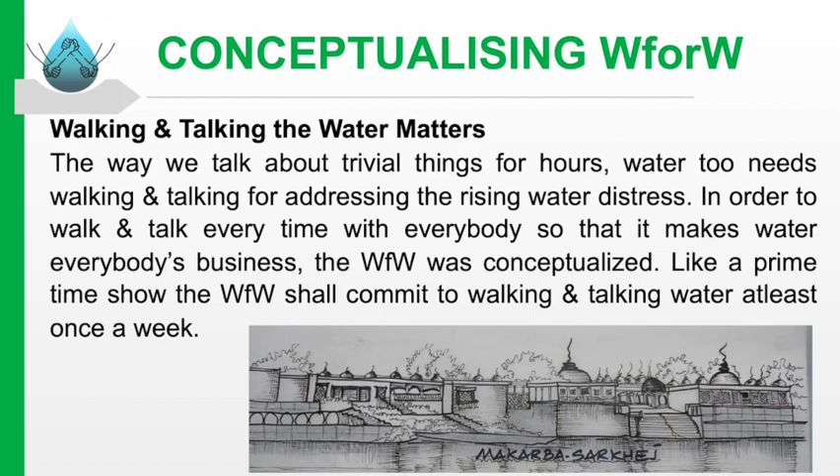The way we talk about trivial things for hours, water too needs walking and talking to address the rising water distresses. The way Wednesdays for Water is conceptualized as a prime time show, it wishes to make water everybody's business. The idea of the series was conceptualized in August 2020, and by the end of the year, the team and the structure was pretty much in shape.

We started in April 2021 with Dr. Rajendra Singh's inaugural speech. We wish to bring science and society together, and therefore we try to bring in every session either a policymaker or practitioner and a researcher or academician. We also think that future generation is crucial and therefore they have presence in each session.

We are going stronger with every week now with session on either quiz, couple of weeks of hard talks, and a week of soft session of art and music. There is a simple structure for each session of quiz, hard session, and soft session, which are moderated by the core team member. Here is a glimpse of what we call as hard sessions and soft sessions.

Yes, good evening, everyone, and thank you for joining us for an interesting Wednesdays for Water session on the theme of wastewater treatment and environmental sustainability. And the process of wastewater treatment has actually many benefits, and that makes it very important for achieving environmental sustainability in the short term, medium term, and long term.

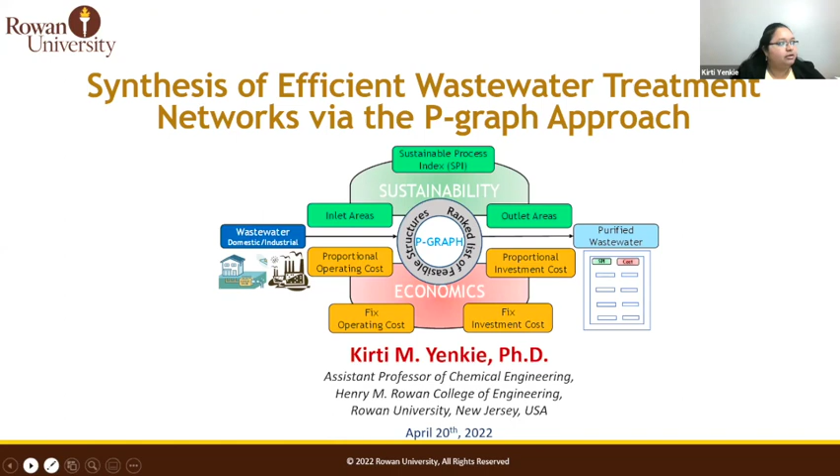The first graduating class was in 2000, and currently we have 6 bachelor degree programs, including chemical engineering, civil and environmental, electrical and computers, mechanical, biomedical, and experiential engineering. We also have a master's and a PhD in engineering program. And this is one of the fastest growing research universities. So I'm glad to be part of this institute.

With that, I would now like to talk a little bit about the overview of my talk. So first of all, as my area is systems engineering, which is mostly related to mathematical modeling, optimization, and control, I would like to pose the wastewater treatment problem and explain why systems engineering or modeling can help us with efficient synthesis of these networks.

Then the designing aspect and what goes into the process. Then I will explain a methodology which is based on graphs and networks, known as the P-graph method. And then I will demonstrate this approach via a case study, which has the municipal wastewater, some results, and then conclusions and future work.

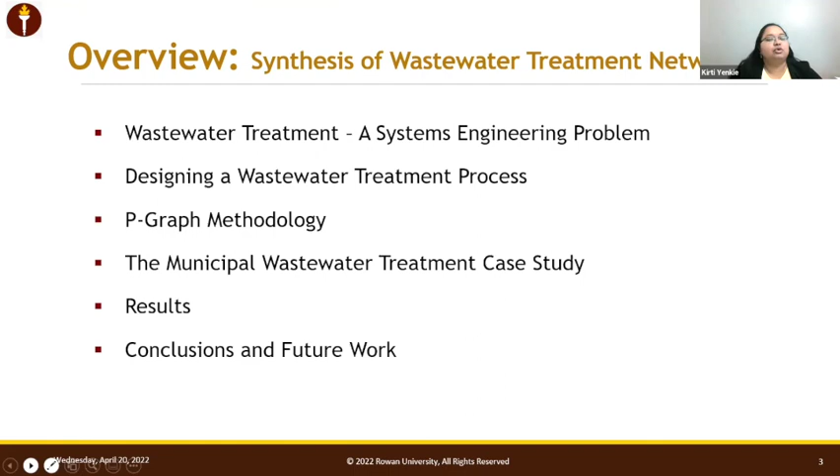So I think this community is well aware that we do need to look into other aspects of recovering water, because if you look at the total world availability in regards to water, much of it is in the form of oceans, which are highly salty. We cannot use them. We only have about 2.5% of freshwater resources. And in that also, most of that is in the form of ice and snow. So that leaves us with very little freshwater and groundwater resources.

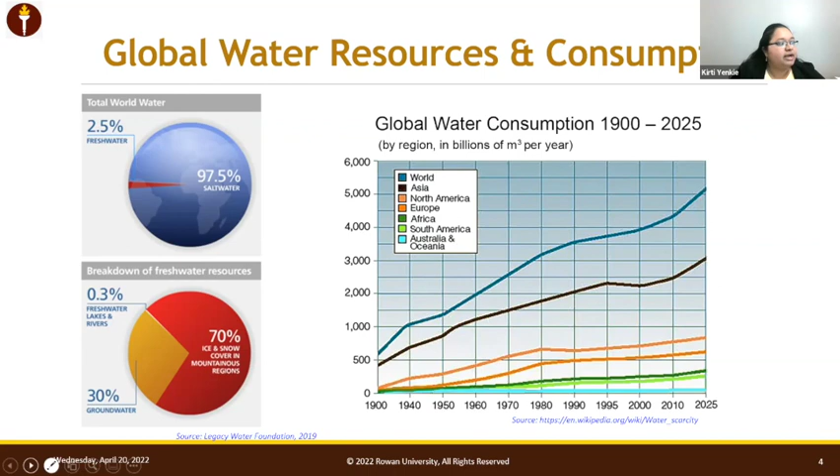And if we look at the overall statistics of how global water consumption has been increasing in the past, I would say around 125 years, we can see that there is an increase in all the continents of the world. So there is this increasing demand, but we do have resources which remain constant. And that is where we have to come up with a solution where we can meet the increasing demand for water. And that is where treating and recycling water could be an alternative. In order to do that, we need to come up with efficient wastewater treatment methods today, so that in the future we can satisfy these growing needs.

And everything, when we start with something, it takes a process. We have to work on that and improve it further so that we can finally get something which is more sustainable. And that is where systems engineering can help and provide you with some sustainable as well as cost-effective insights, because we do want to be cost-effective as we are looking at treating waste, and we also have to balance the overall cost as well as environmental impact whenever we are designing a new process.

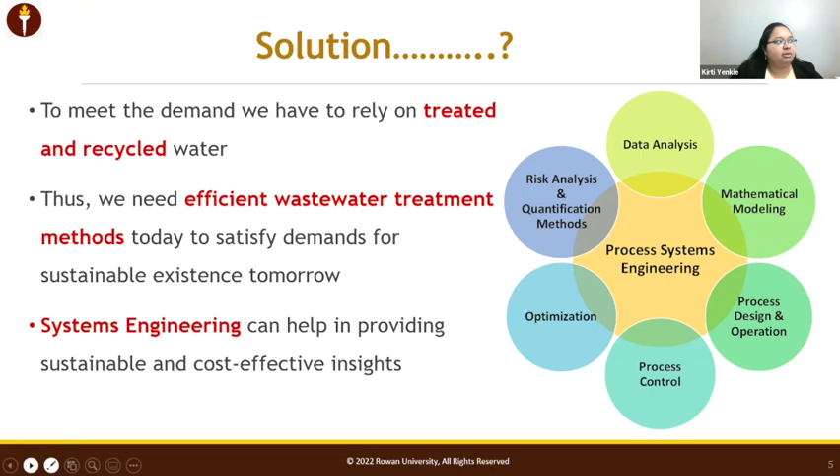So as I mentioned, process systems engineering encompasses multiple dimensions. It includes data analysis, mathematical modeling, process design and operation, process control, optimization, risk analysis, and quantification methods. Now, these are all related to the more computational side of things, but if we look at the wastewater treatment problem and try to analyze it in a systematic way, what do we see? That wastewater can come from multiple sources or multiple industries and areas.

So we could have wastewater coming from a food industry, which could be large in volume, and most of the waste could be starches, then food colors and all those kinds of agents. Pharmaceutical is another type of industry. The wastewater here would be containing active pharmaceutical ingredients and maybe some hazardous solvents. So in those cases, treating the wastewater will be very different as compared to what you would do in a food industry. And you can see many other areas from where we can find wastewater. Power plants, hydrothermal power plants usually use them, chemical industries, also domestic sources, agriculture, and so on.

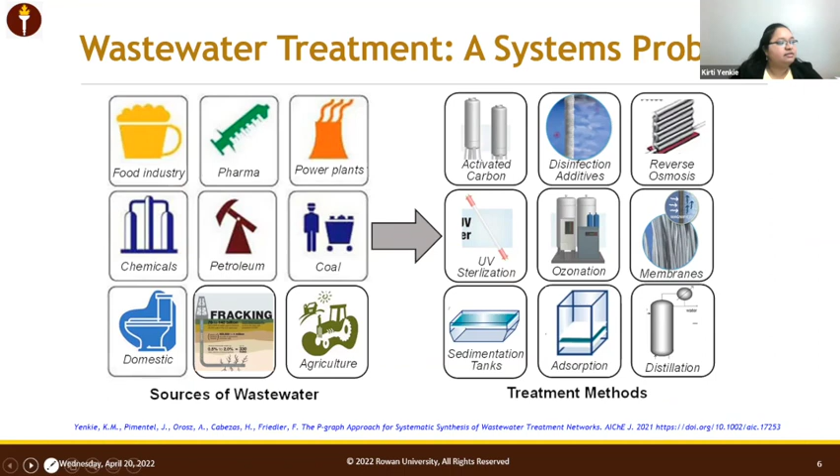And if we look at the available treatment methods, there are multiple options. We can use activated carbon, we can use disinfection, membrane processes like reverse osmosis, and so on. We can also use UV sterilization, advanced oxidation or ozonation processes, settling tanks, and so on. So in order to find out which particular method or a combination of these methods would treat a specific type of wastewater more effectively, we have to match them well and then decide on a cost-effective as well as a sustainable process. So in that sense, this appropriate selection becomes a systems engineering problem.

And then when we look at the overall complexity or what goes behind when we try to design a systematic treatment process, let's look at just one of the tasks, which is solids removal. Solids can be removed via multiple technologies. We can use sedimentation, which is based on gravity settling. We can either go for a membrane process, where the pore size of the membrane as well as the overall permeability of the component will decide what will be separated.

We can go for filtration if the particle size is larger, and we can use regular filter presses. We might also do screening if we have large grit particles and gravel, or sometimes if the particles are lighter, then we could use a flotation technique. Now, for a simple task like solid removal, I have provided that there are 5 different methods and there can

be many more. So if we look at the total design of the problem, let's say if we had about 5 components in a stream, so this could include solids, solvents, active pharmaceutical ingredients, and then we have 10 different technologies to treat them. Overall, there are around 140,000 possible networks. Out of them, not every network will be feasible because it will not take you to the desired purity or whatever guidelines you need to meet, right?

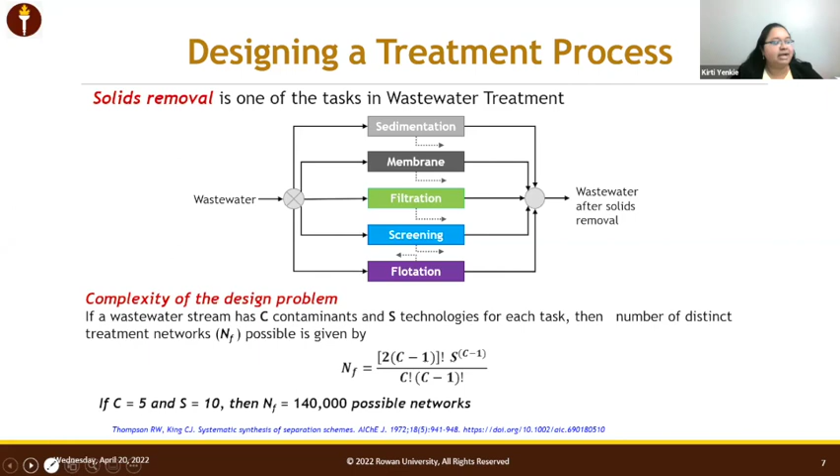So only some of them will be feasible, and among those feasible networks also, some of them will be more cost effective as compared to others. Some of them would be more sustainable as compared to others. So that is where the problem becomes a more systems analysis or detailed mathematical analysis problem.

As well known in most of the wastewater treatment and engineering textbooks, we can divide the wastewater treatment in a stage-wise manner as seen here. I have taken this from some of the standard books like Metcalf and Eddy, and you can find more details in one of our papers on how these technologies have been segregated into stages, as well as their model equations which are used in our models for finding the appropriate network.

So if you see, pre-treatment is mostly to facilitate solid removal, and it includes flocculation. Flocculation is basically adding a flocculant that leads to formation of clusters of particles which become higher in density, and then you can remove them via settling. Screening I already talked about. Then sedimentation is based on settling due to gravity, filtration, and so on. These are mostly for solid contaminant removal.

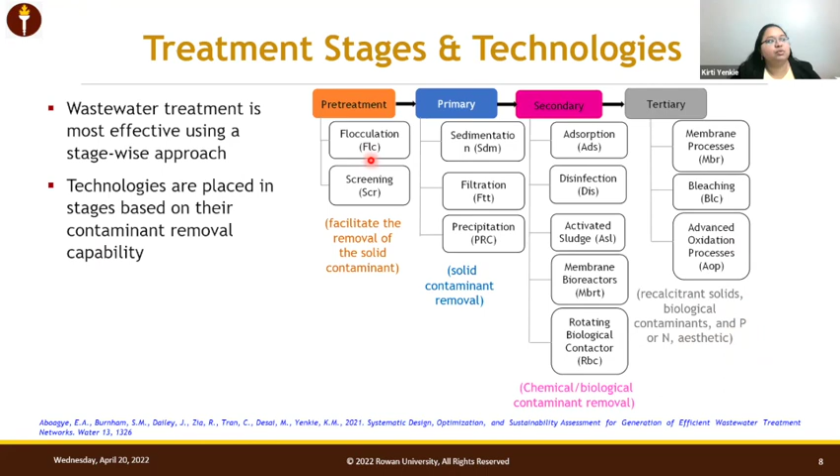Secondary are to remove chemical and biological contaminants, and there are multiple options here as well. And in the tertiary stages, you're basically trying to remove some of the recalcitrant solids or some of the contaminants which could cause coloring or undesired appearance of water, by using some of the advanced techniques. That is why, by using these criteria, they have been placed into 4 different stages.

Using this idea, the next approach which we are applying to design of wastewater treatment networks is based on graphs. I think we all are aware that graphs are basically connections which connect one particular node to the other via connecting arcs. So in the P-graph, the components present in the wastewater stream as well as water will be categorized as materials.

Raw materials are something which are entering the system, so these could include high level of contaminants, water as well. Sometimes we might just physically remove these contaminants, so the product subset would still be the same. Sometimes we might have some chemical changes, so then this product subset could be altered. And not every time we will just have one stage, right? We might have multiple stages, so these would also generate intermediates. These are the representations in P-graph, and each of them have a certain property.

For example, a raw material does not have any input going into it, but will only have a certain output arc leaving it. A product will only have some input arcs coming to it, and it's a terminal node. These properties are already well established, which helps us in generating a network. Operating units are represented by these horizontal bars, which are our technologies. In this technology, you can provide the details of cost and sustainability, and that is how you end up formulating the complete network.

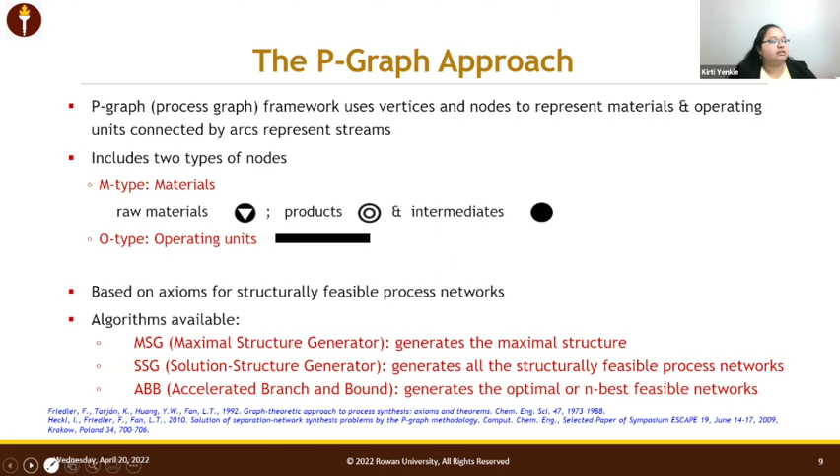And since these are more mathematical, I'm not going into the details, but if you are interested, I have also provided some resources to the Wednesdays for Water community, and you can find more information there. So with that, this is our framework which we are applying to wastewater treatment network.

And the case study currently which we are looking into is the municipal wastewater treatment, where we have categorized things into solids, chemicals, and then of course water, which we are trying to recover. These are the inlet amounts in kgs per hour. And then the purity requirements have been given here, that we at least want to remove the solids, and if they are around less than or equal to 500 kgs per hour, we are good. It's okay for disposal. Chemicals should be less than or equal to 5 kg per hour, and so on. And then we also want to recover at least 80,000 kgs per hour. So these numbers are taken from this source.

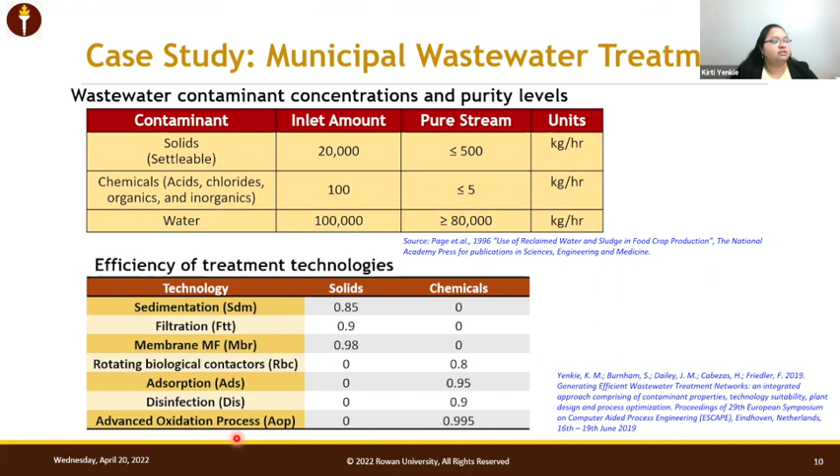And here I'm looking into the different technologies which are used in our treatment network, which includes sedimentation, filtration. And as we can see, the technologies which remove solids have a certain solid removal efficiency number. So 85% for sedimentation, 90% for filtration, and so on. And for chemicals, we are including rotating biological contactors, adsorption and disinfection, and advanced oxidation process. So with these numbers, when we input them into the system, the other thing is we also need to analyze what are the potential structures, or you can say the overall networks which are feasible.

So in that case, when we try to generate this maximal structure in stage 1, which is mostly for solid removal, we have sedimentation, filtration, and membrane processes. Sedimentation being a low efficiency technology, sometimes depending on your requirement, it might be followed by filtration, it might be followed by membrane. Similarly, filtration would be lower in efficiency as compared to membrane. So filtration could be followed by membrane. But you should also have the opportunity, if your treatment has removed the desired amount of solids, then you can take the treated water stream to the next stage from these particular nodes. Okay, so this generation of the maximal structure is of essence. That is what can capture the maximum possibilities.

And when we do that, as we can see, there are 7 potential nodes here. And then there are 8 such operations, because we can also bypass the stage for solid removal. We don't need that. So that makes it 8 operations. Similarly, if we look at the next stage, which is stage 2 and 3, that leads to 18 such operations. And this is the entire structure which we should analyze if we want to look into all possible methods, as well as find out the most cost-effective and sustainable option. So this exhaustive enumeration is important.

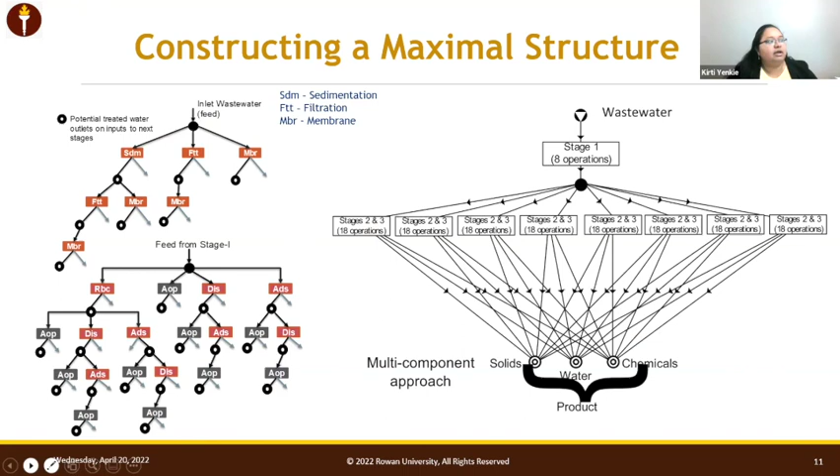And then this is the overall methodology, that after we write down a case study with the different contaminants and also the water, we formulate the synthesis problem, which includes our input stream composition as well as the requirements of the final treated stream. And then we list our technologies, generate the exhaustive structure. We define our cost estimation model, our efficiency or the recovery ratios, and then we construct the entire problem structure using the stage-wise approach and solve for feasible paths.

And then the accelerated branch and bound is what leads to the identification of all the optimal structures, and it also ranks them on the basis of the metric. So let's say if you want cost to be the metric, it will give you the lowest cost followed by the next best, followed by the next best. If it is a sustainability index, then it can also do that. It can rank that on the basis of, let's say, land area occupation or sustainable process index, which I will be talking about a little bit later.

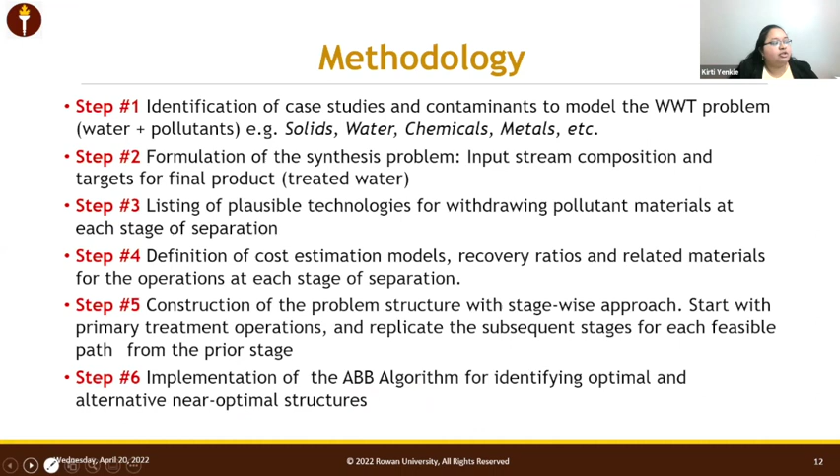Okay, so with that method, the overall network structure, as you can see, we can now visualize this in the P-graph Studio, where we have these particular technologies and options for solid removal. Then we have the second and third stage as shown here. Okay, and then the second and third stage is elaborated in this particular diagram, and we can clearly see the type of nodes we have for raw materials, products, and intermediates.

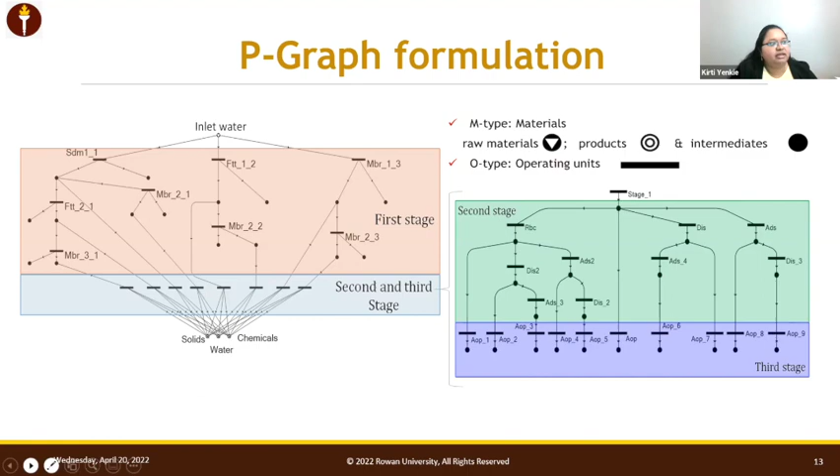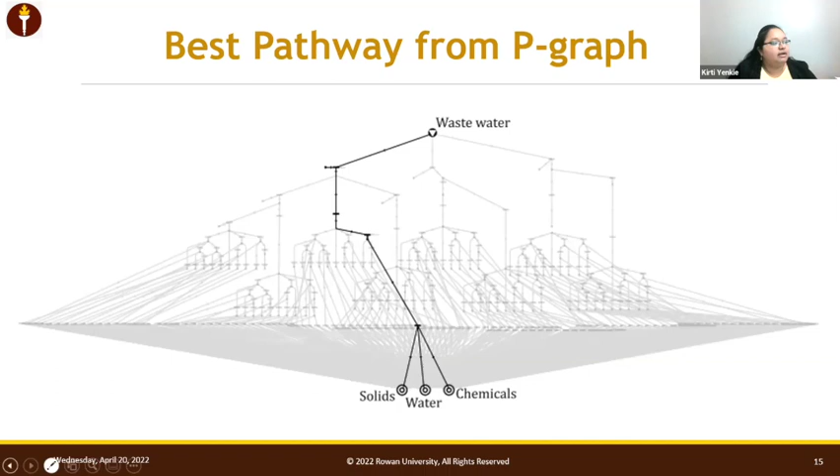Okay, and finally, this generates a big structure like this. And due to the ability of computational methods and the P-graph axioms, we can solve this particular problem within minutes, and we get the best possible treatment path as shown here. And finally, since I mentioned that it gives you all possible feasible networks, overall, we actually generate around 1,200 such feasible networks.

Out of them, I'm only showing you the first 4 optimal structures. And as you can see, in the first one, it just gives you membrane followed by adsorption. And this is the cost number. Then in the second option, the cost increases a little bit. Okay, it just goes from 12.49 to 12.65 cents per liter. But if you look at the structure, we now have membrane followed by rotating biological contactors, adsorption, but it asks you to bypass around 21%.

So some of these things might not be clearly visible when we are designing treatment networks in a traditional way. We can get more non-intuitive and optimal solutions if we go with some of these advanced modeling techniques. And with better computing facilities, these are possible. So that is why we are looking into analyzing treatment networks in a much better way.

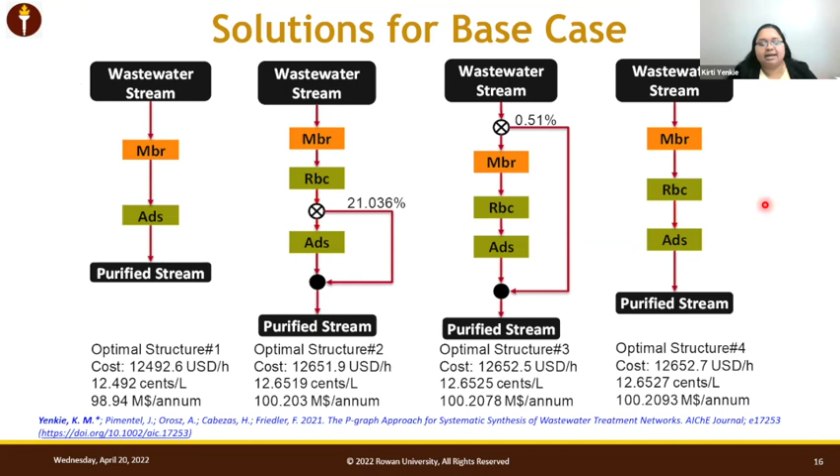More details about this exact case study can be found in our paper, which is in the AIChE journal. And the materials which I distributed include an Excel tool as well as supplementary material for you to understand this case study. So along with that, we also did some parametric studies. Parametric studies help us in understanding how sensitive our optimal network is.

So for example, sometimes our wastewater treatment composition can change. Our amount of chemicals can change, amount of solids can change. So for example, let's say if the chemicals are changing, then we will basically change the value of the arcs or the amount of inlet chemicals into the water.

And when that happens, our best structure, so let's say if the chemicals change to 10 kilograms per hour, then our best structure changes. It was earlier filtration followed by RBC, but then there is a little bit of a bypass happening because the amount of chemicals is lesser. Then if it goes to 50 kgs per hour, then it changes from filtration to membrane, and then so on.

Similarly, if we change the recovery requirements for chemicals, so instead of 10, we make it 0.5 or so, then we can see that different technologies get selected. And these results, you can obtain them within minutes. It doesn't take you a lot of time because of the capabilities of the solution algorithm.

And there are other ways in which parametric analysis has been conducted. Due to limitation in time, I'm not going into these details. But as I mentioned, the AIChE journal paper talks about all these parametric studies in more detail.

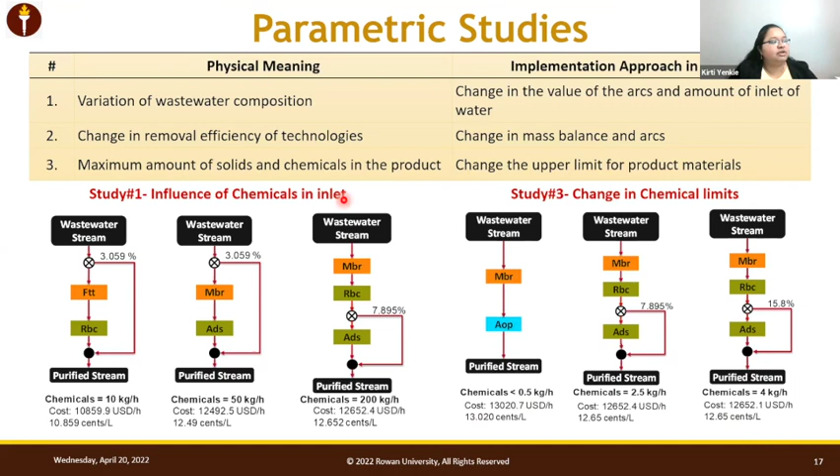So along with that, the same index, like the cost index, can be replaced by a sustainability index like the sustainable process index. So sustainable process index, it is a reasonable metric. Why? Because you can map everything into one particular metric, which is the amount of area needed to embed either your inputs, services, as well as whatever outputs are being generated.

So in the input, which can include your raw materials, it could comprise of renewable, non-renewable sources, energy consumption, staff requirement, and whatever installations you need for running the wastewater treatment plant. And then you also have your process which generates certain products. So in this case, it would be the treated water. And then in the process, due to the technologies, you might have some air, water, and soil emissions.

Everything gets mapped into the single unit of per unit area, and that helps in getting you a single metric. Like cost is one metric, SPI becomes one metric, and then you can analyze the same network in terms of SPI. So as I mentioned, I'm not going into details of how this is done, but the detailed description of SPI can be found in this paper, which talks about SPI application to solvent recovery. And we are currently working on incorporating this in the design of wastewater treatment networks as well.

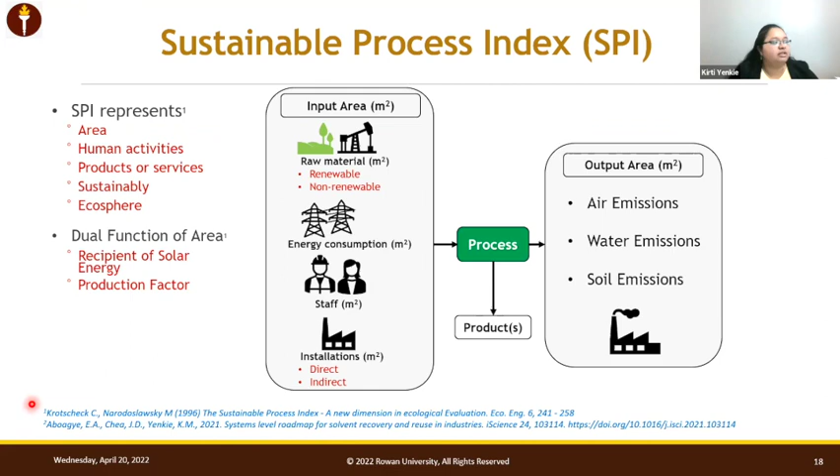So in summary, I talked about how integrated design and optimization can help us in generating efficient wastewater treatment networks. The P-graph is based on simple graph theory, which includes a set of nodes and vertices. And based on certain axioms which P-graph follows, we can get detailed insights into costs, as well as it can lead to some non-intuitive solutions.

We are extending this to apply to more complex wastewater treatment structures, as well as including the sustainable process index to incorporate sustainability in our evaluation. And the P-graph tool in Excel, which is provided in this particular link along with the supplementary resources, allows for simplified use and analysis.

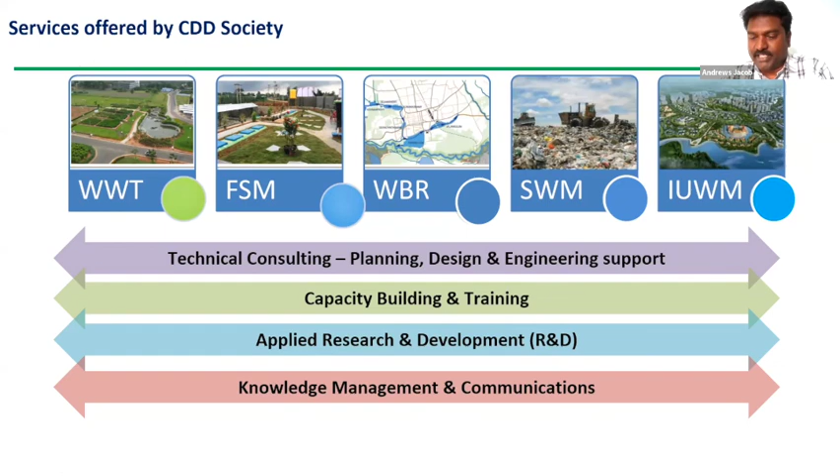CDD works mainly on wastewater treatment and fecal sludge management, water body rejuvenation, solid waste management, and integrated urban water management. Across this, we do planning, design, and implementation of projects. We conduct capacity building programs and trainings. We also conduct applied research, and we develop knowledge management documents and communication materials. These are our donors and key partners.

Now, coming to the point, we have a Center for Advanced Sanitation Solutions, which has a training unit where people can come and take training on water and sanitation. We also have our NABL accredited laboratory where we conduct a lot of innovative research on water and wastewater sanitation. We have a design and production unit where we manufacture ready-made wastewater treatment systems. And we also have our knowledge management unit, where many publications can be downloaded from our website.

And we have a sanitation exhibition where someone who does not know anything about sanitation can come to a one-stop shop for understanding sanitation. He or she can understand the issues in sanitation in our country and how those issues can be solved, or what possible solutions are available. So it's a very interesting exhibition, designed for school children to professionals.

Now I'm going to talk about wastewater treatment in a decentralized and nature-based way. So this is a city scenario you see, right? If you want to provide a wastewater treatment system, you all might know that there are STPs, sewage treatment plants, connected by underground drainage systems, which we call centralized treatment systems, where all these places can be connected, and this place also can be connected.

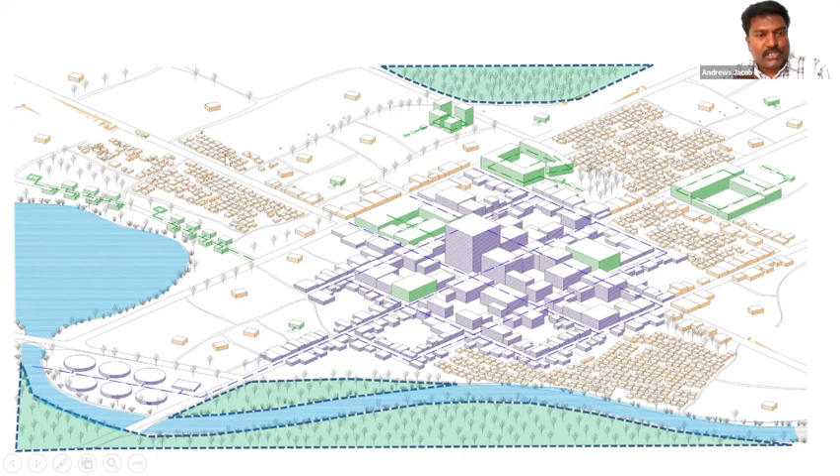So in this one, they are facing two things. One is the cost of connection: distantly located colonies or houses also have to be connected through pipelines, which costs more. Also, mostly the sewage treatment plants are highly energy intensive systems.

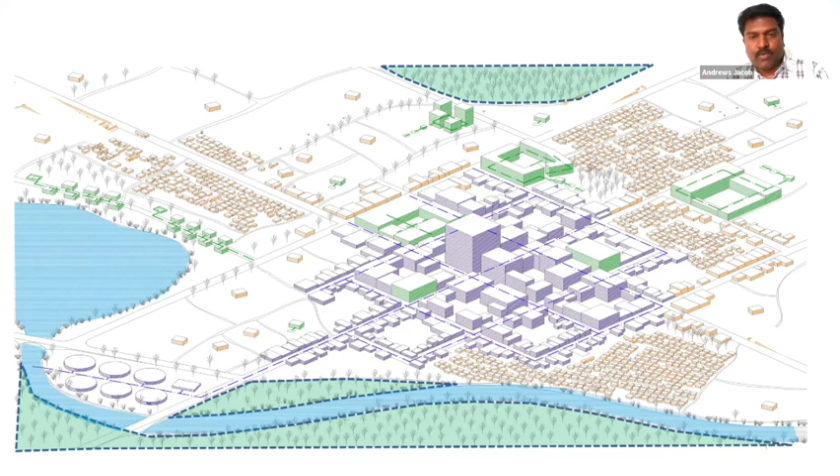So that's where the operational maintenance is much higher cost than implementing the systems. So wherever you go in sewage treatment plant systems, you might see some of them or most of them are not working because they are very cost-intensive operational things. Meaning one is the energy-intensive, other one is the chemical-intensive wastewater treatment systems.

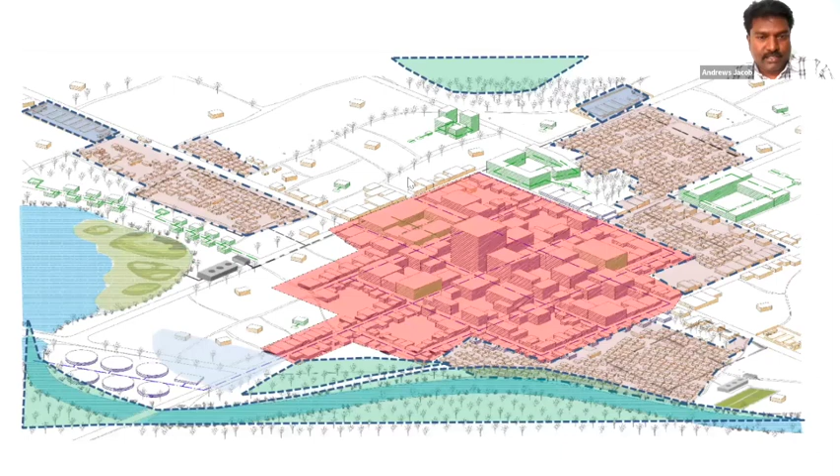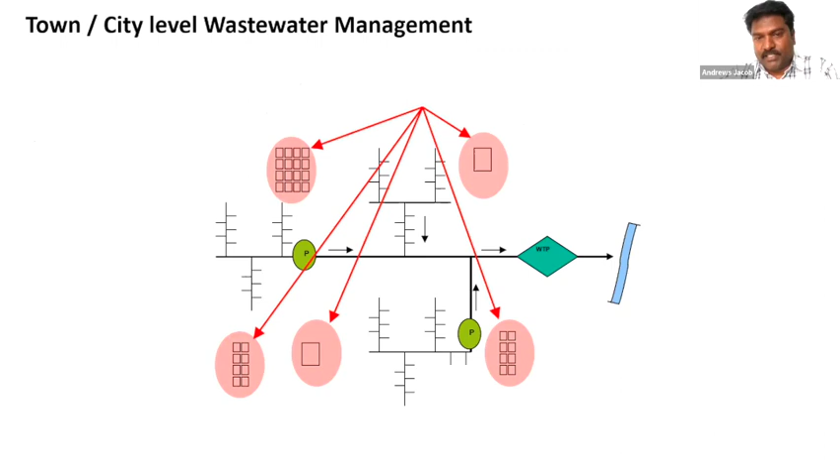So imagine that in a city, the underground drainage systems are connected and they are treated in a common treatment plant or a sewage treatment plant. There are a lot of newly upcoming colonies, households, everything. So you cannot keep on extending these kind of underground drainage systems, where the decentralized systems are much more appropriate solutions. So for example, if you provide a smaller treatment system like that, then you will have a comprehensive coverage of the wastewater treatment systems.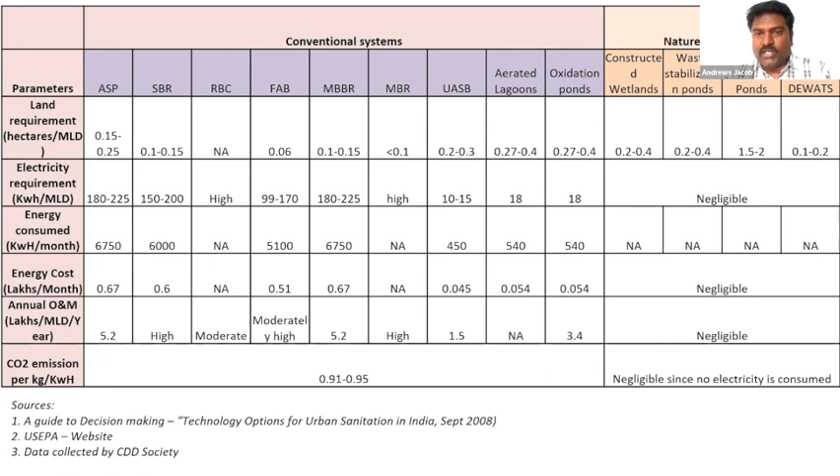So then, what is this nature-based treatment system, you might wonder. So this is just a conventional treatment system which is already existing, and now in these systems we are trying to mimic the existing nature treatment system. So the naturally occurring microorganisms treat the wastewater, meaning they eat the organics. Organics are nothing but our feces.

So here I just provided a flow of the treatment system. As Dr. Kirti showed in her presentation, the primary treatment system, secondary treatment system, and tertiary treatment system. The primary is basically the sedimentation or settling. And the secondary could be either chemical or biological based. So chemical systems mainly use addition of chemicals for removing the pollutants, whereas biological systems work through microorganisms. So here the system is mainly based on microorganisms. It's an anaerobic system where the anaerobic microorganisms, in absence of oxygen, treat the organics. Then comes the tertiary treatment system, which is the polishing of the wastewater.

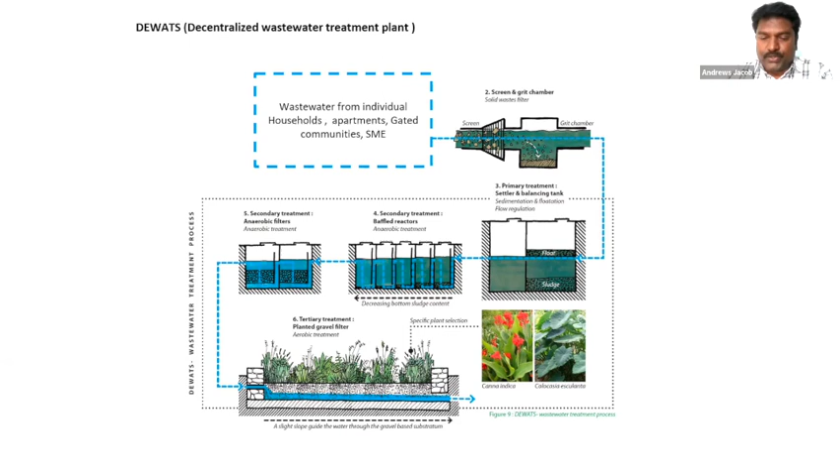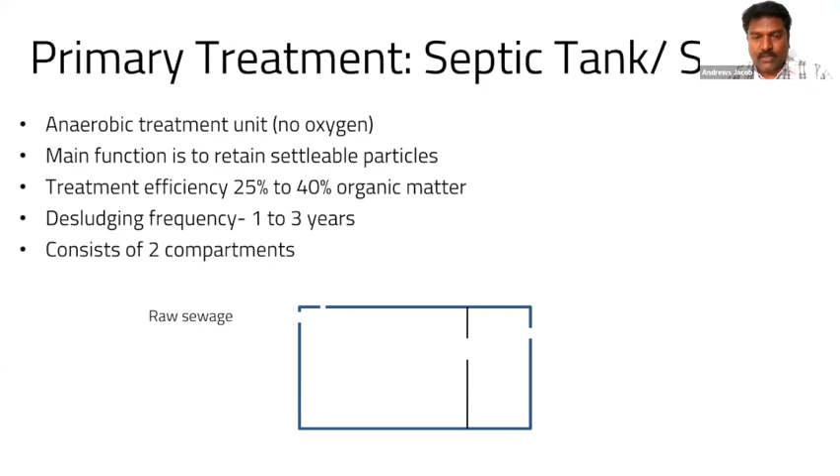So this is what we are going to quickly see, how these systems work. In the primary treatment system, we have a sedimentation tank, or you can call it a settler, which is nothing but a kind of septic tank, but with lesser retention time. Retention time is the number of hours the water stays within the tank. So when the raw sewage comes, it goes to the bigger first tank, where all the sedimentation of the sludge happens, then it goes to the next smaller tank where further sedimentation happens. So here, as a primary treatment system, only sedimentation happens. Sedimentation is nothing but separation of water and solids.

So in this treatment system, almost 40% of your solids are settled, mainly the bigger solids. The suspended solids in the wastewater will go to the next biological secondary treatment, which is a series of chambers where the water is allowed to go through in an upflow direction. So you might know the upflow anaerobic sludge blanket reactor type of system. This is similar to that one. So the wastewater comes down, and from here it goes up and then to the next tank, and then from the top it comes down and goes again. So it is going in a series of upflow directions where the water is kept in a suspended way.

So this is called the suspension media, where the floating microorganisms in anaerobic condition are treating the wastewater. Treating wastewater is nothing but eating the small organics found in the feces. So this type is called an anaerobic baffle reactor. This is a closed system, so we call it anaerobic, and we make the water go in a baffled way, so we call it an anaerobic baffle reactor. Similarly, we also have systems called anaerobic filters, the same series of tanks wherein fixed media will be kept.

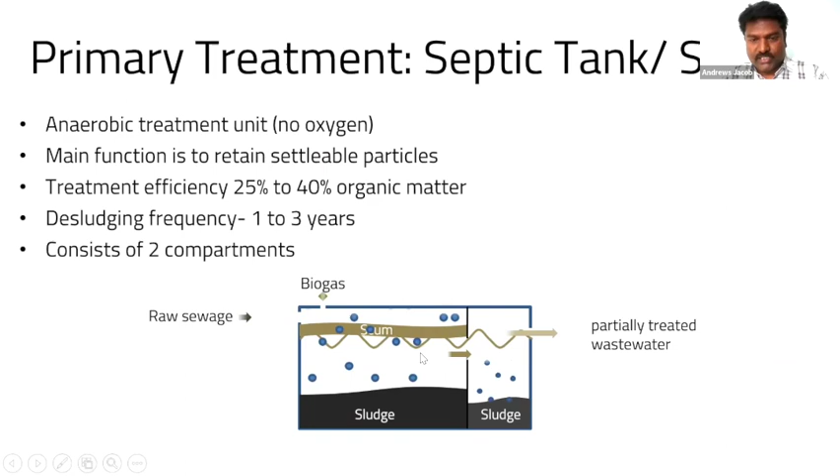So in the previous modules also, these are all closed systems. So when the water goes, you don't see the wastewater. Here it is again a closed system. You don't see the wastewater. Even in this system, in the 60 centimeter filter media pack only 50 centimeter of water will be kept. On the top, you will see only the plants. So you don't see the wastewater at all. So once the treated water from the planted gravel filter comes out, then you see the clear water.

So here you have not seen any energy used. You have not seen any chemicals used. And this is one such nature-based treatment system. There are similar nature-based treatment systems available like phytorid, soil biotechnology, and constructed wetland treatment systems. So those are all other treatment systems which we can also try to learn, and then we can see how we can adapt them.

See, the main point I'm trying to say is that implementing a wastewater treatment system is easy, but maintaining the system is becoming very difficult now. Why? Because we need to continuously look at the treatment systems for providing chemicals, switching on, switching off. If there is no power, then you need to have a backup system. So all those things have to be ready for maintenance of the treatment systems.

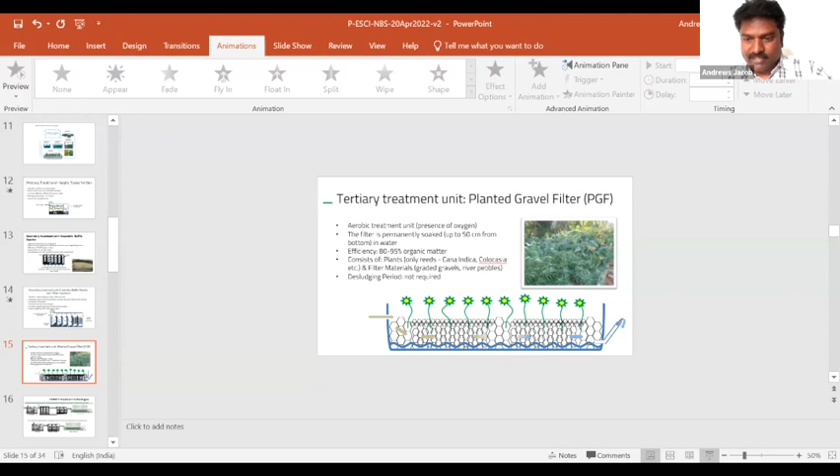Suparna. Yes, I have just turned off my video. So yes, you're back on, Mr. Andrews. We missed you for a few seconds. That's it. Yeah. So there was a power cut.

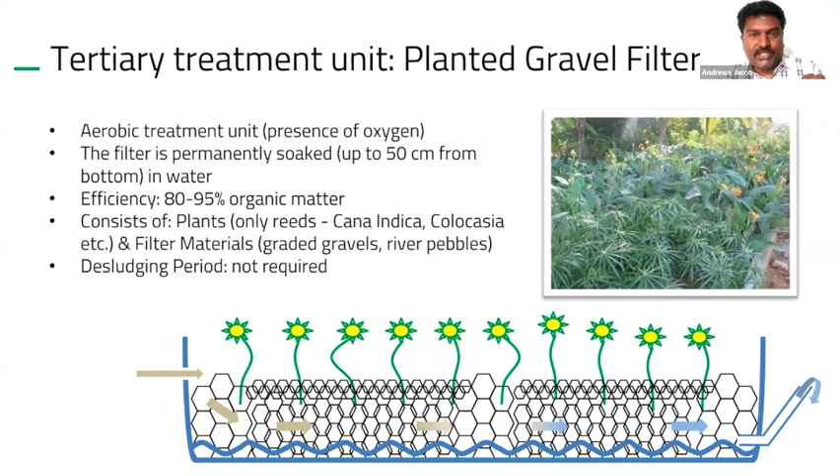So okay. So I talked about the planted gravel filter. After that, I was talking about the maintenance of the systems, where we need more power and chemicals and maintenance, meaning that a skilled staff member should be there. So that cost becomes very huge, and that's why many systems fail in the long run. But when we go for a nature-based treatment system, the maintenance will be very low, and you don't have to do it on a day-to-day basis. So that is how we promote nature-based treatment systems.

So using these nature-based treatment systems, you can treat highly polluted domestic wastewater like our household wastewater, for example with the settler followed by an anaerobic baffle reactor, followed by an anaerobic filter, followed by a planted gravel filter. Or for moderately polluted water like gray water, which is the water that comes from the kitchen, bathroom, everything, we can just use a settler followed by an anaerobic filter and then a planted gravel filter, because the baffle reactor is mainly used when the organics are more and we need a robust system, whereas in gray water we might not have much organics. So we directly use these kinds of systems.

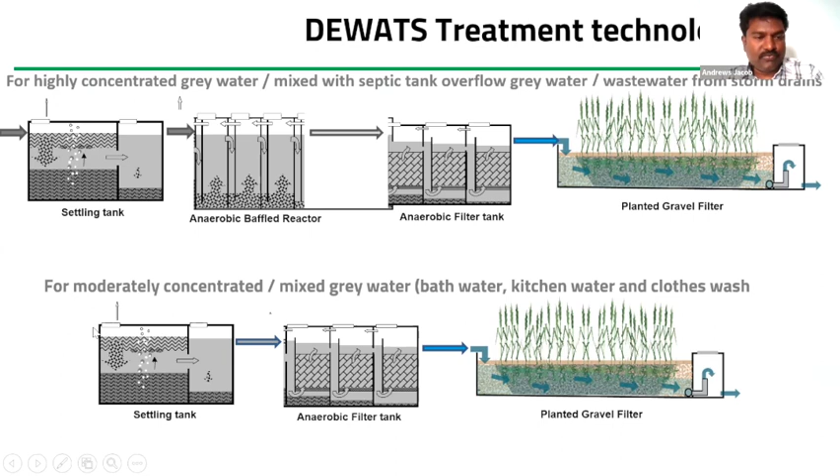You can even modify these kinds of modules. With that, you can play around and customize different types of treatment systems. For example, for less concentrated wastewater, you can have a proper sedimentation, meaning a water-solid separation system, followed by the planted gravel filter, or what we call a constructed wetland. Or you can sometimes use a constructed wetland directly for some wastewater treatment. So it all depends. You can make a lot of permutations and combinations, and you can modify and customize with these kinds of modules.

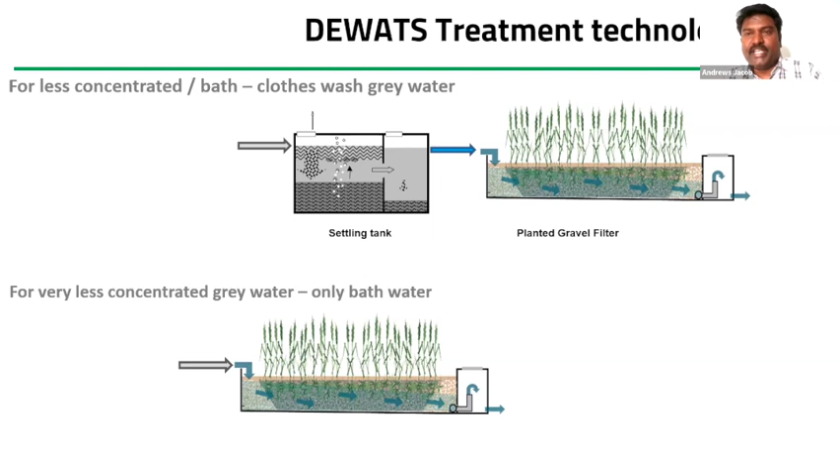So I told you about the modules just to learn about the process, so that the implementation can happen in a very systematic way. We also provide ready-made treatment systems, or fiber reinforced treatment systems, that can be directly fixed for smaller colonies or some kind of apartment or single households. We can provide these kinds of systems.

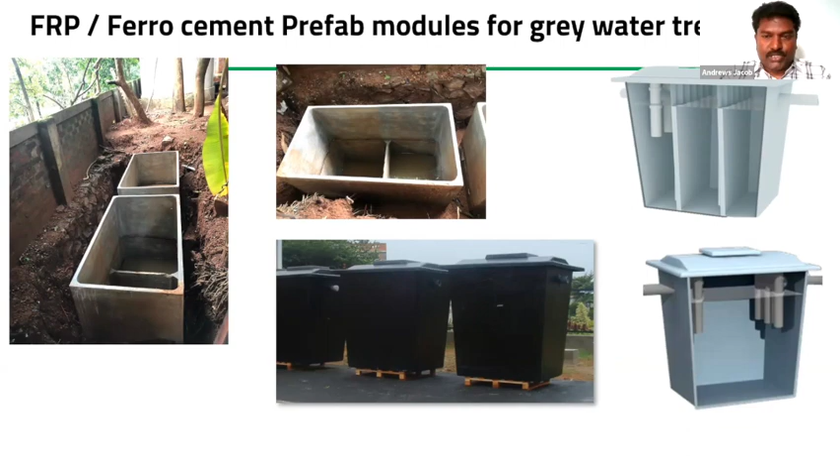So I'll try to show some of the systems. These are the systems we have implemented at the household level; for one household, there is a treatment system. This is implemented in an institute called KILA. KILA is the Kerala Institute of Local Administration, which is in Thrissur.

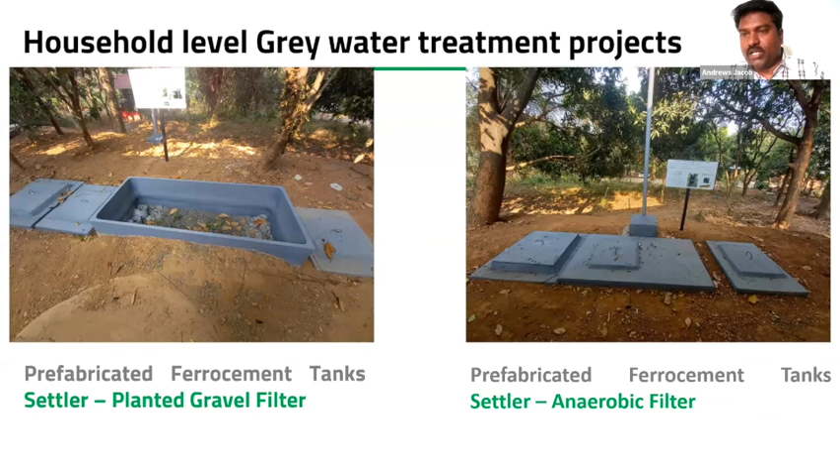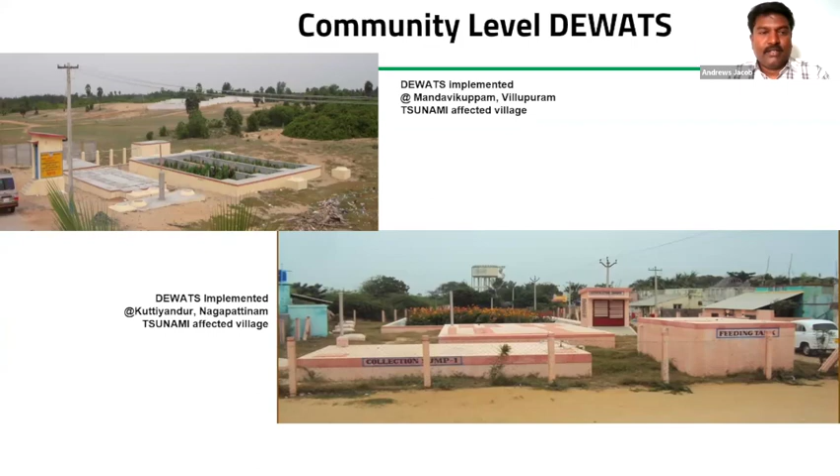So these are similar systems implemented for tsunami rehabilitation households in Tamil Nadu. We also provide the same kind of systems for water body rejuvenation. For example, most of the urban lakes are polluted because they receive urban sewage, and the stormwater drains, which are meant to carry runoff, the rainwater, now always carry sewage. So we divert this drain water into a DEWATS, or settler, anaerobic baffle reactor and anaerobic filter based systems, followed by treatment wetlands, then it is let into the lakes. So that's how slowly the lakes can also be rejuvenated.

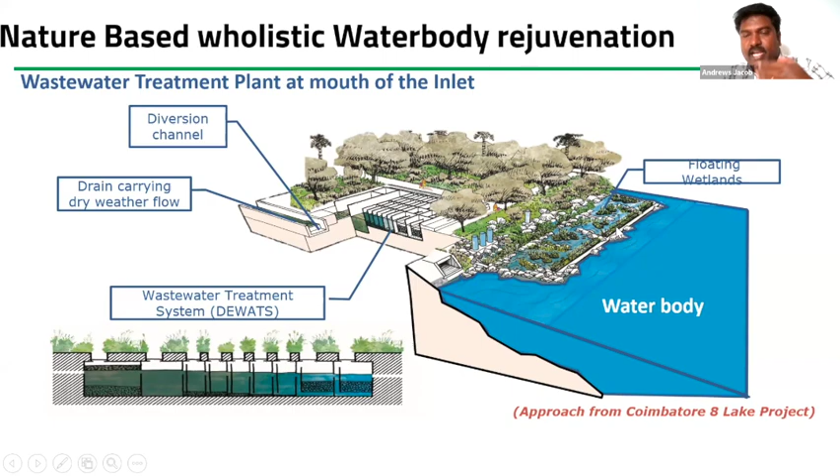The same DEWATS or nature-based systems can be used for treatment of fecal sludge also. Fecal sludge is nothing but the sludge collected from septic tanks and soak pits. Households who do not have underground drainage or any other treatment system have a septic tank and soak pit. But once in 4 or 5 years, whenever they are filled, they have to be desludged, and then that is thrown somewhere else, very indiscriminately. So now cities have come to adopt fecal sludge treatment systems, and even in this, we can adopt the same nature-based treatment systems.

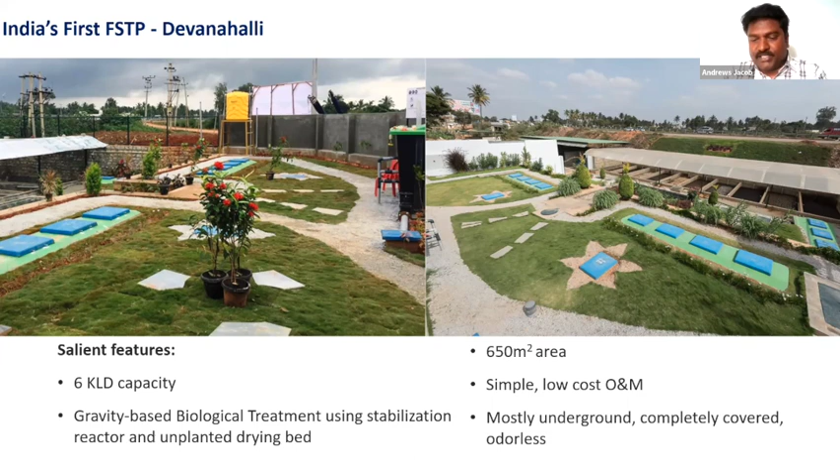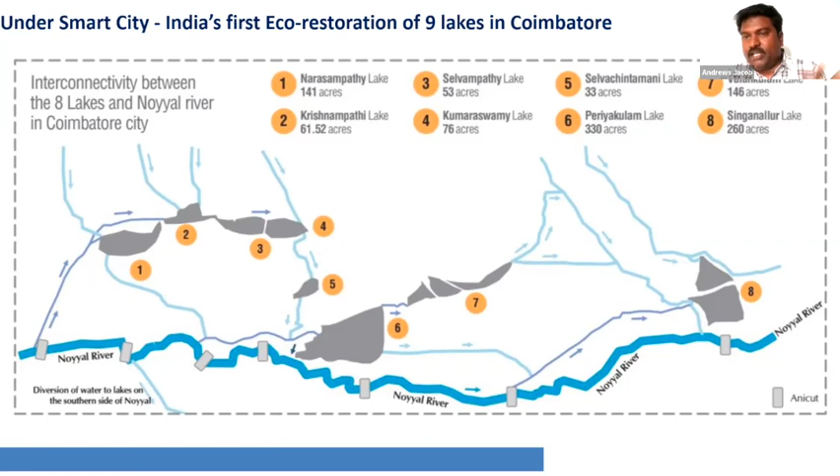So this is one nature-based treatment system we adopted in Coimbatore under the Smart City project. For almost 9 lakes, we have provided these kinds of systems for rejuvenation and restoration. This is one such lake, Periyakulam in Coimbatore. We have also provided city-level pond rejuvenation systems by understanding the quality and quantity of the wastewater coming in the drain, and provided constructed wetland treatment systems as a nature-based treatment system for rejuvenation.

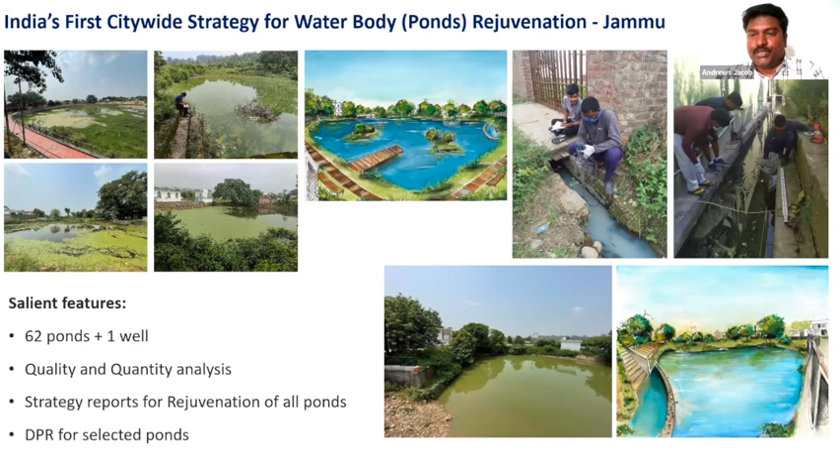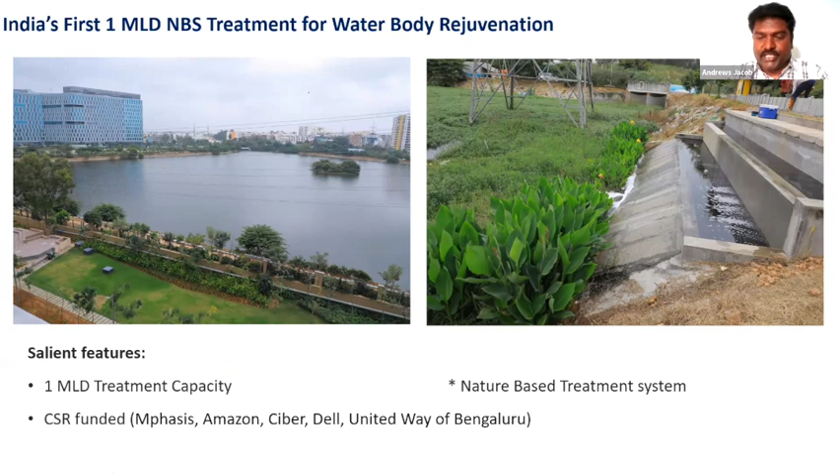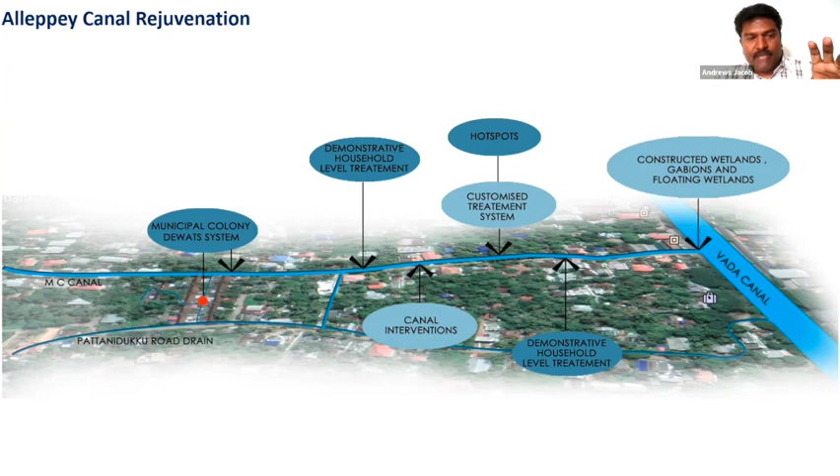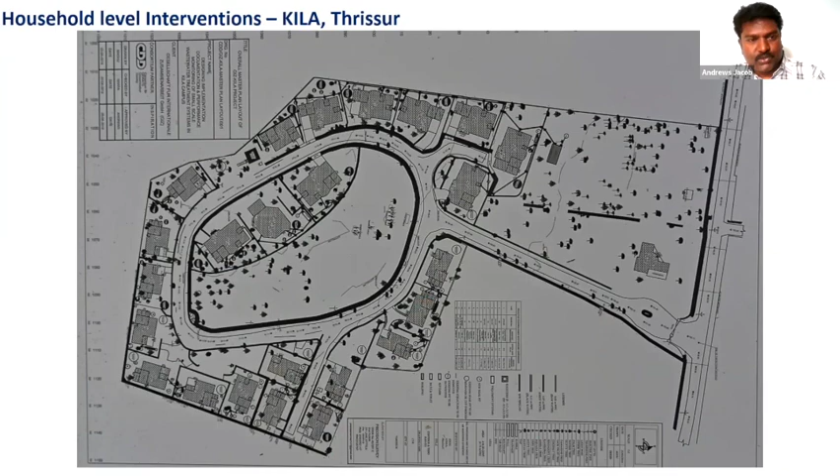This is one nature-based canal rejuvenation in Alappuzha. We did this as a pilot project. We collected wastewater from 220 households and provided nature-based treatment systems: a DEWATS with settler, ABR, AF, and planted gravel filters. This is the one I mentioned, KILA, where we have provided 14 different types of household level treatment systems. What you can see are the individual household treatment systems.

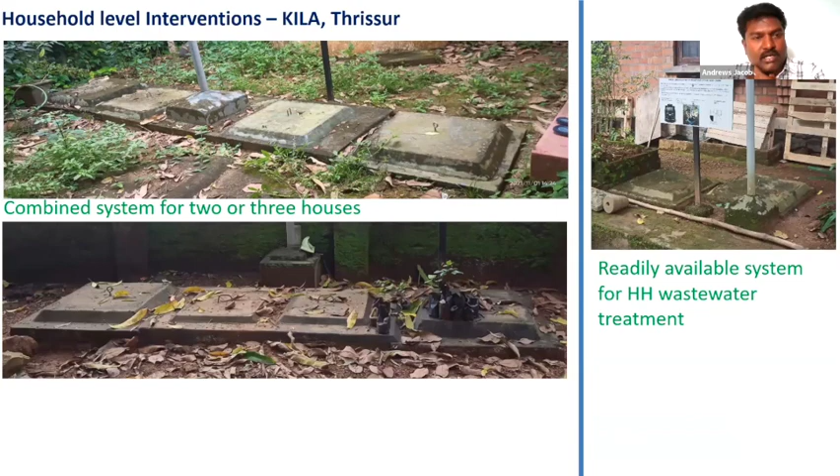Now we are doing a similar project in Munnar for rejuvenation of a river called Nallathanni, which is an ongoing project. We are proposing similar treatment systems there as well. So on the whole, what I'm trying to say is wastewater treatment systems are very important, and it's up to us how we want to approach them. If we want sustainable treatment systems, we need to also think about operation and maintenance, which is why we promote nature-based treatment systems for their sustainability. That's it. Thank you very much. I would be happy to take questions.

Thank you so much, Mr. Andrews, for walking us through the journey of your organization into decentralized wastewater treatment inspired by nature-based systems and solutions. This was very insightful, and I was very happy to see the case studies. I'm sure all our participants could relate to some of the cities you have shown, Jammu, Munnar, and other places. Thank you so much.

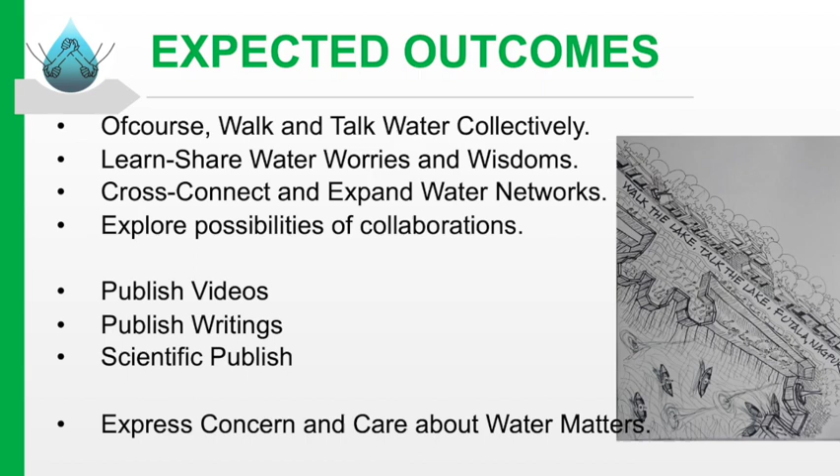Besides walking and talking water, worries and wisdoms collectively, we see this as a platform to cross-connect and expand our network and explore possible collaborations. We are also making notes to publish both scientific and non-scientific work. Here is a glimpse of some of our writings.